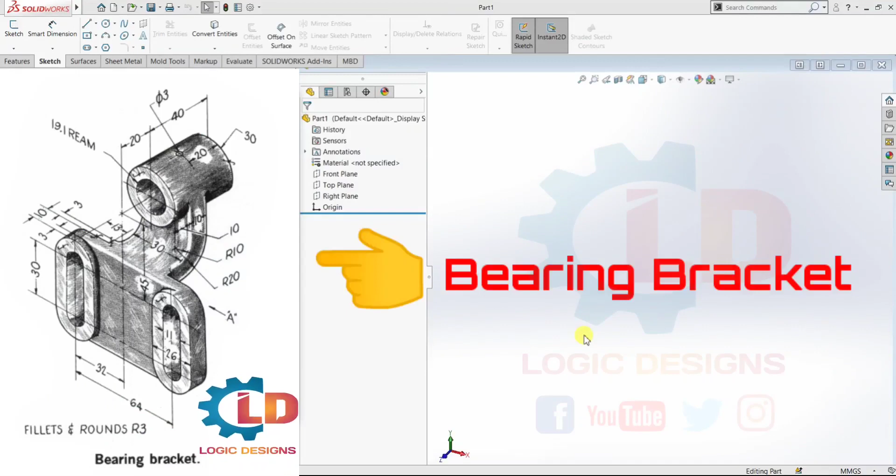Now this is our SolidWorks working interface. Now you can see here on left side of the computer screen or a mobile screen, this is our today's 3D model of a bearing bracket. Now read all drawing annotations or dimensions from this given image.

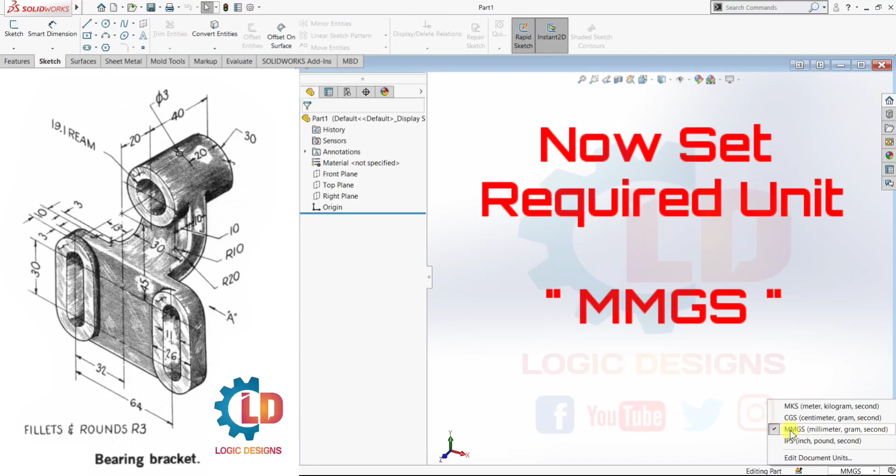Before that, select unit. For that, go to the right bottom corner and select MMGS. You can select CGS, MKS and IPS as per your drawing requirement. Here my requirement is MMGS, so MMGS is selected. Now here I am creating this 3D model as per given image.

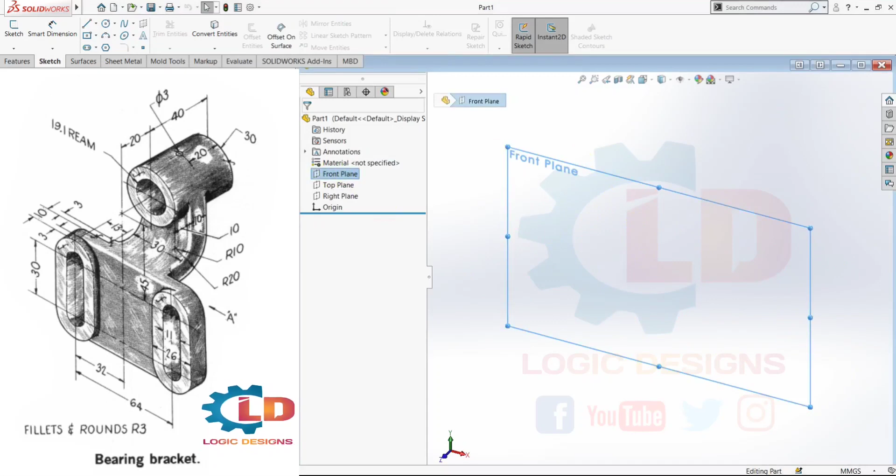Now class, create here first bottom side of a bearing bracket on a front plane. Select front plane and go to the sketch. Select sketch and press Ctrl+8 for normal to. Now create your first vertical center line. For that, go to the center line. Now create center line from UCS. Okay. Now create one horizontal line also.

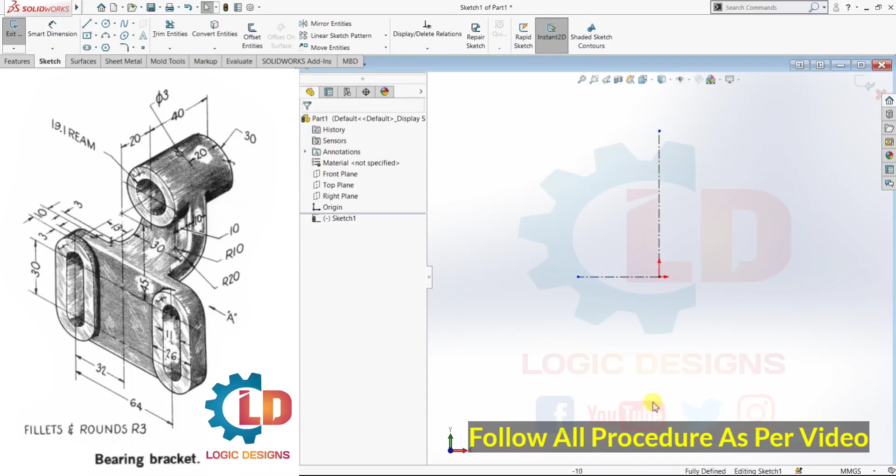Create line by using line command, and put here smart dimensions. Select smart dimensions and select this line and put here 32 mm. Here I am putting 32 mm distance. Now again create one vertical line from end point of this horizontal line. Now put here smart dimensions 30 mm.

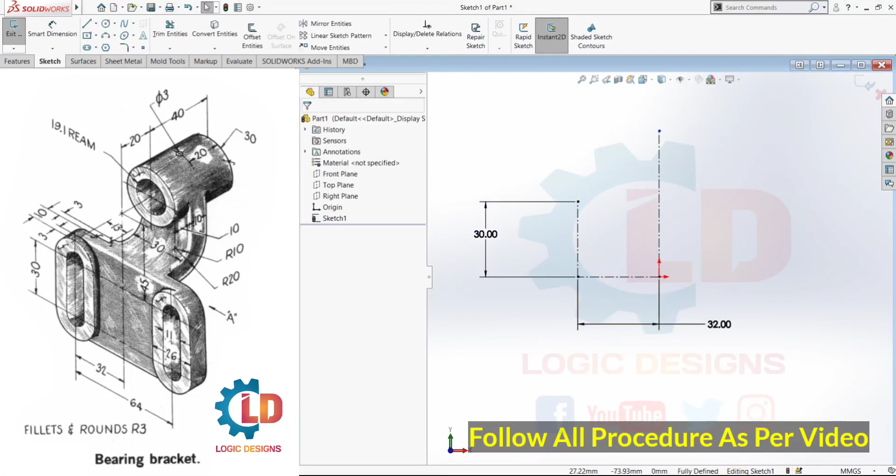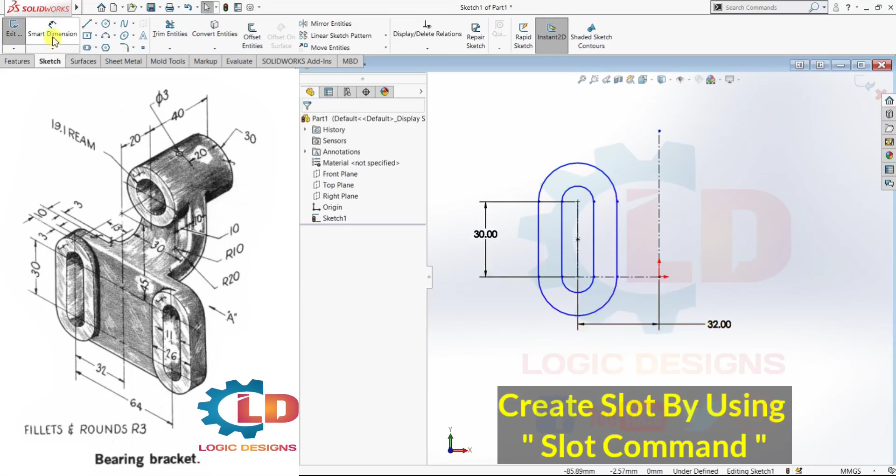Now we are creating slot by using slot command. Select slot command and select these 2 points, point 1, point 2, and create slot. Another one. Okay. Now slot is created. Now give smart dimensions as per our given image. Select this line. Select this line. Put here 26 mm. Now inside one slot, this is 11 mm. Select this line and put here 11 mm. Now our sketch is fully defined.

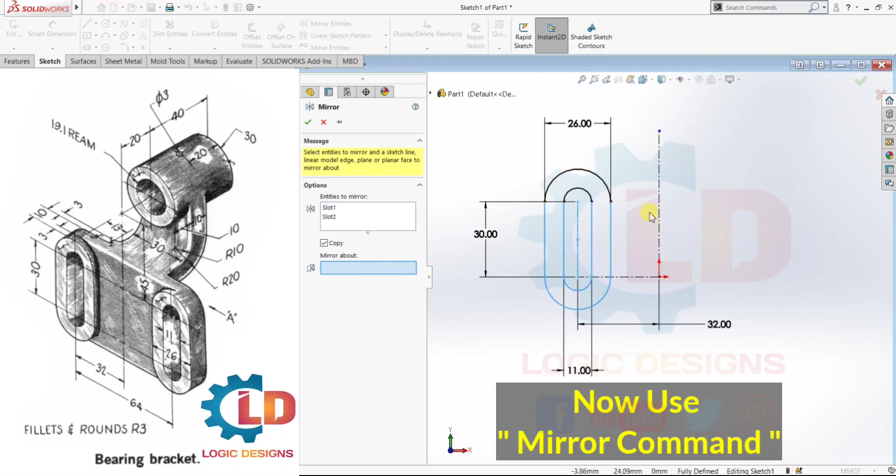Now mirror this object on a right side. Go to the mirror entities. Select the mirror entities. Select all required entities. Now mirror about, select vertical center line. Now I can show another slot is created on right side also.

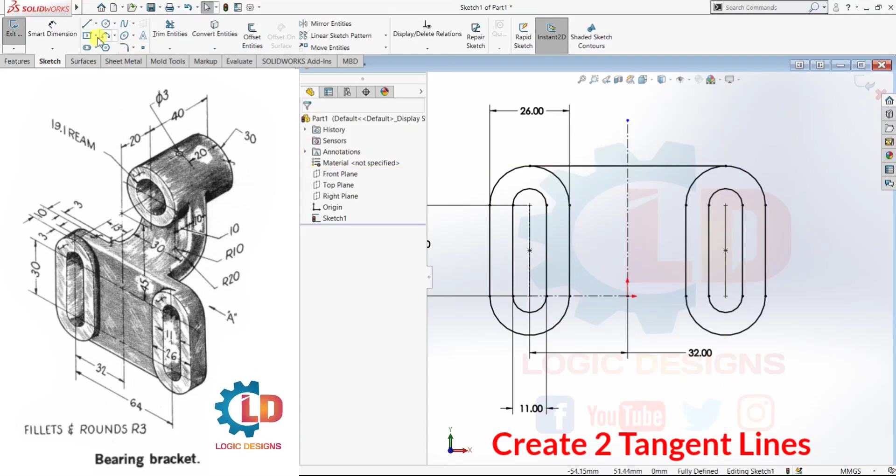Now create 2 tangent lines between these 2 slots. For that select line, select center point, select center point. Okay, now line is created. Now again one line for a bottom side. Now our sketch is fully defined and bottom portion of this bearing bracket is now completed.

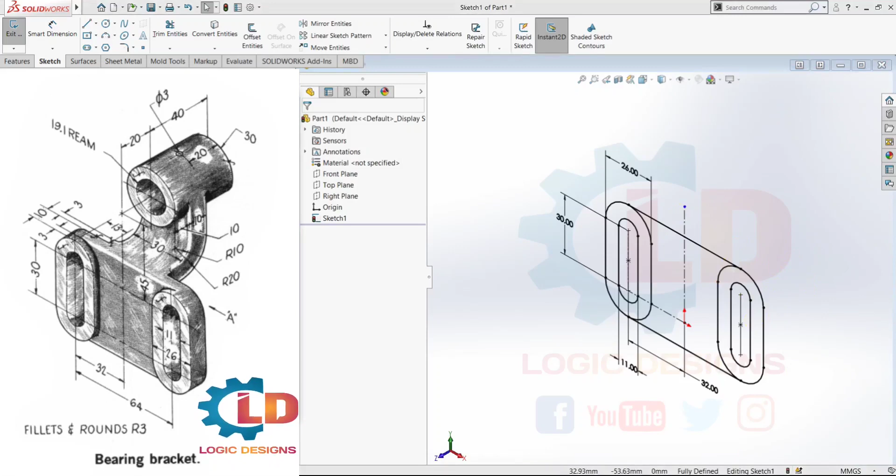Now extrude this slot or a bottom part as per our given drawing. For that, go to the extrude boss base, select only these two slots, and put here 10 mm. Here I am putting 10 mm. Now okay.

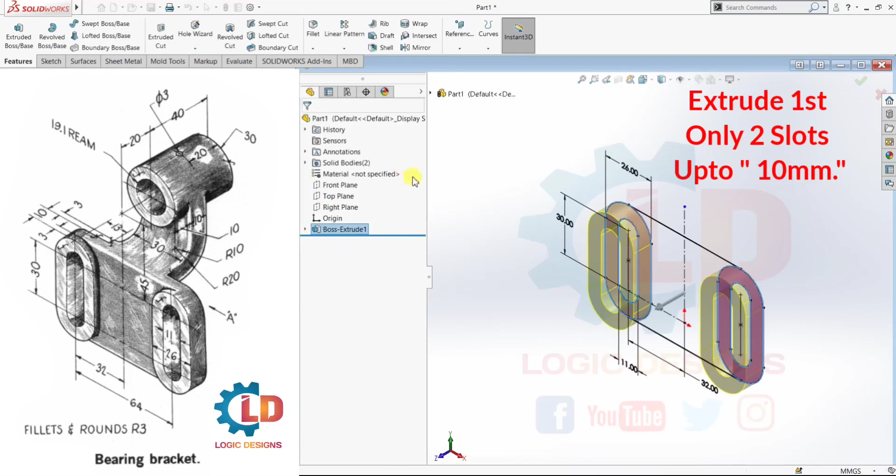Now we need sketch 1 for another extrude. For that, show this sketch: go to the tree, select the sketch, right mouse button click and select eye icon to show the sketch. Now sketch is shown. Now again go to the extrude boss base, select any line. Now go to the selected contours and delete this one.

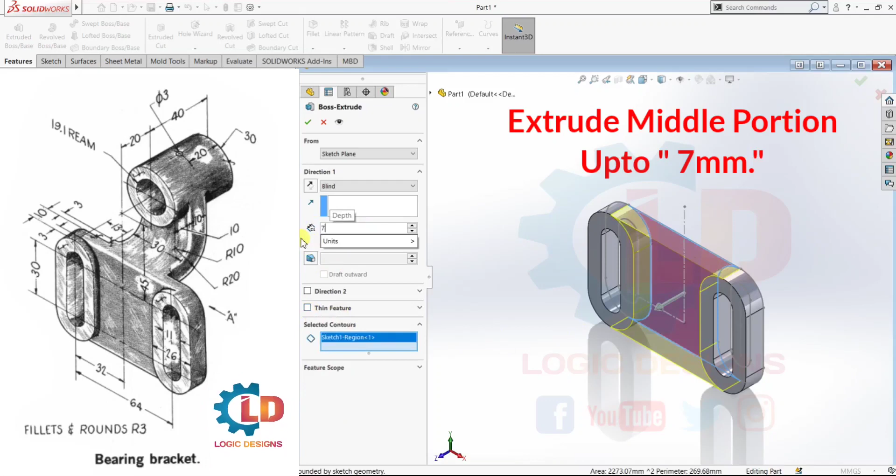Now select required portion. We need this middle portion. Thin feature off, uncheck this one and put here 7 mm distance as per our drawing. Now click on OK option. Now our bottom portion is created. Now hide the previous sketches. I can say the bottom portion is now done.

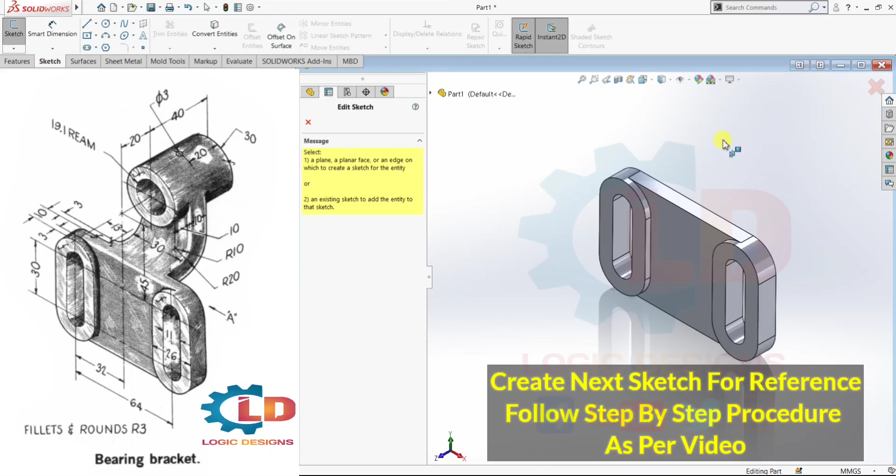Next one, we need to create plate sketch on a top side before we create the angular portion from given drawing. For that, select top portion of this bottom plate. Select this one. Now sketch on it. Now first create one vertical center line. Okay. Select vertical center line. Create one. Now vertical center line is created. Next one, another center line for horizontal. Now horizontal line is created.

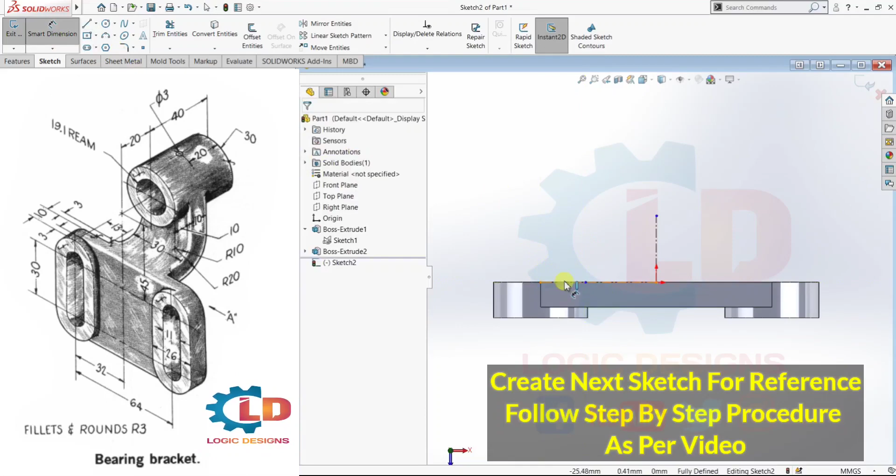Again another center line. Create this one. Now put smart dimensions 13 mm. Select these points and put here 13 mm as per our drawing. Next one, create one vertical line. For that, go to the line, select this point and up to this vertical line. Now two lines are created, vertical and horizontal line. Now again smart dimensions, put here 3 mm. Now our sketch is fully defined.

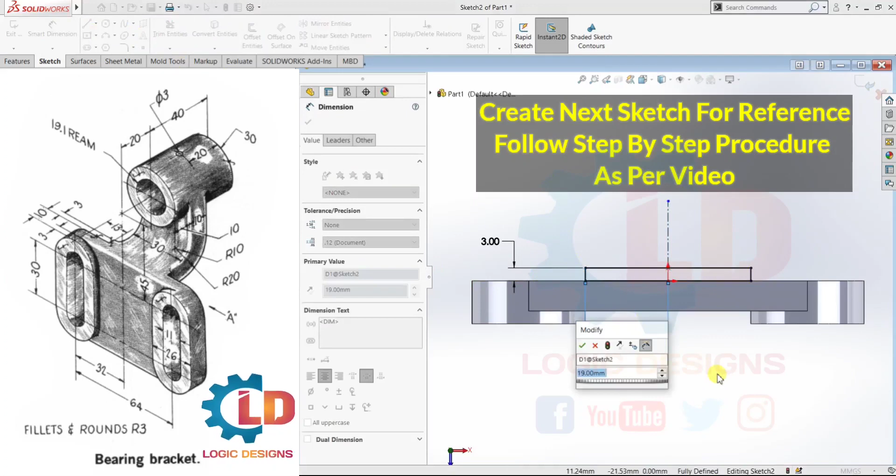Now mirror these entities on a right side. Select mirror entities, select these lines, mirror about vertical center. Now sketch is done. Our sketch is fully defined. Now go to the convert entities and select this line. Now delete all unwanted area. Now again smart dimensions and put the distance. Put here 19 mm distance. Now our sketch is fully defined.

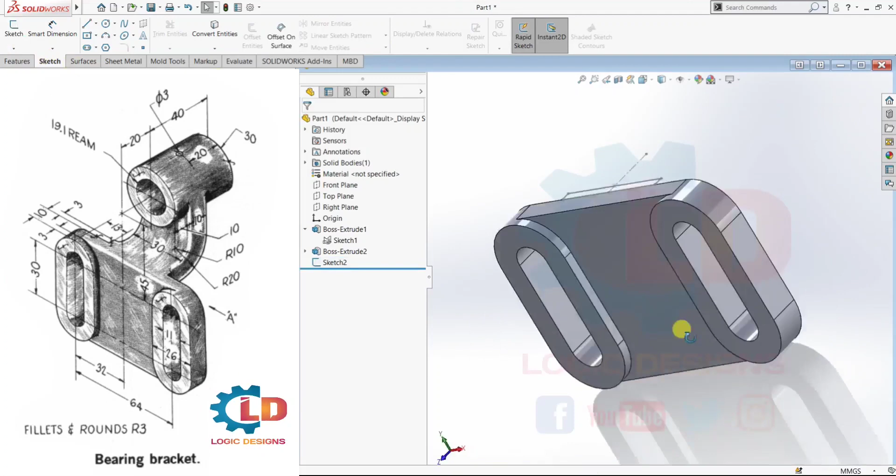Next, we need to create angular portion of a bearing bracket. For that, we need to sketch on a new right plane. Now exit the sketch because we need this sketch at last. For next sketch, select right plane to create curvature portion. Okay, right plane. Now expand this one.

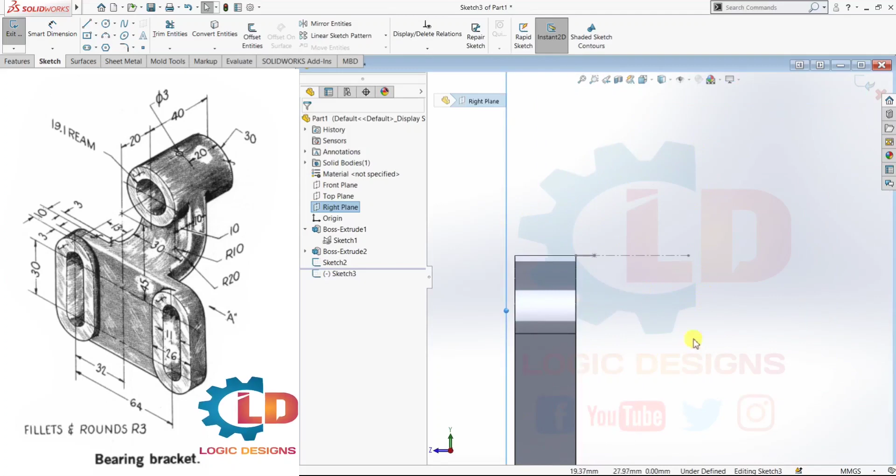Now go to sketch. Now press Ctrl+8 for normal to. Now hide previous sketch 2. Now sketch 2 is hidden. Now start the drawing for sketch 3.

Now first, create one center line. Go to the line, select center line and create one horizontal center line. Now put smart dimensions as per our drawing. Here I am putting 20 mm distance. Now next one,

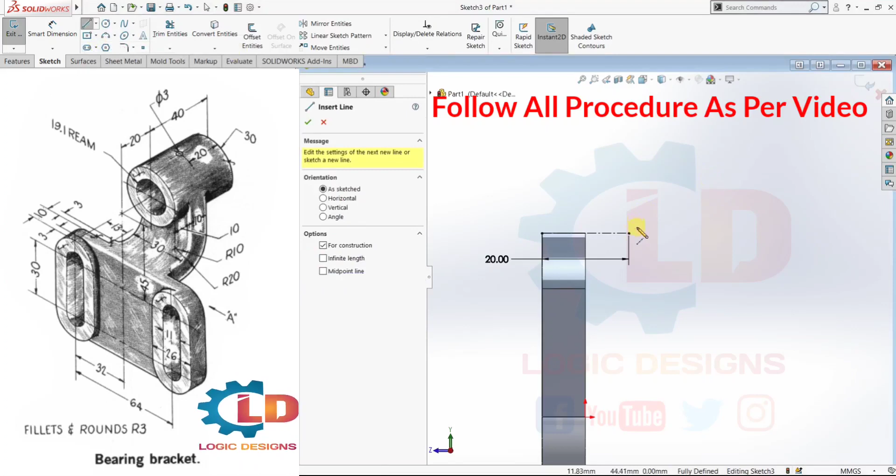create another line from the end point of this previous line. Select line, select center line. Okay, center line is selected. Now create horizontal and vertical center line. Now put smart dimensions. First horizontal line distance is 10 mm and vertical line distance is 32 mm. Put here 32 mm. Now next one, offset the vertical center line.

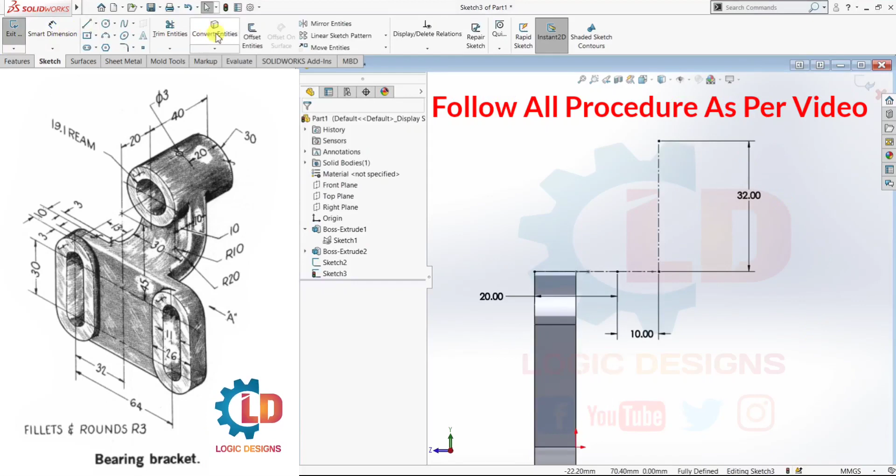For that, go to offset entities, select vertical center line, check this reverse option and put here 5 mm distance. Now create one horizontal line. For that, go to the line and create one line. Use sketch 2 as a reference. Now go to the fillet, select this vertical line, select this horizontal line and put here 10 mm fillet radius. Now OK.

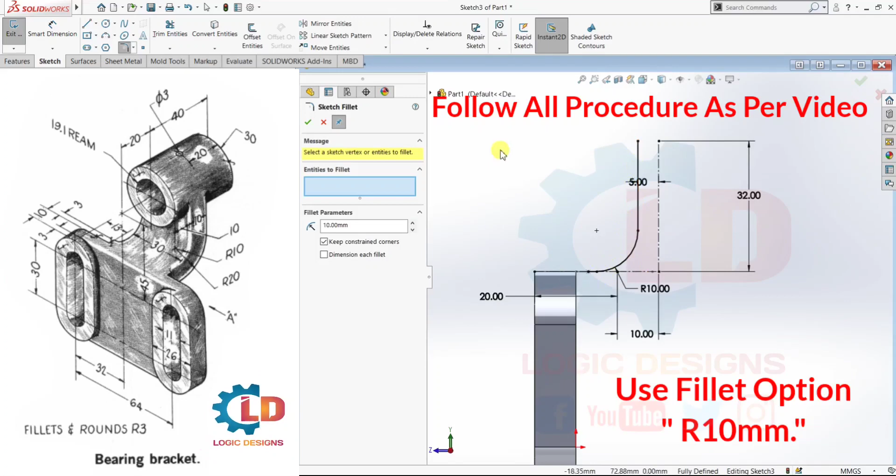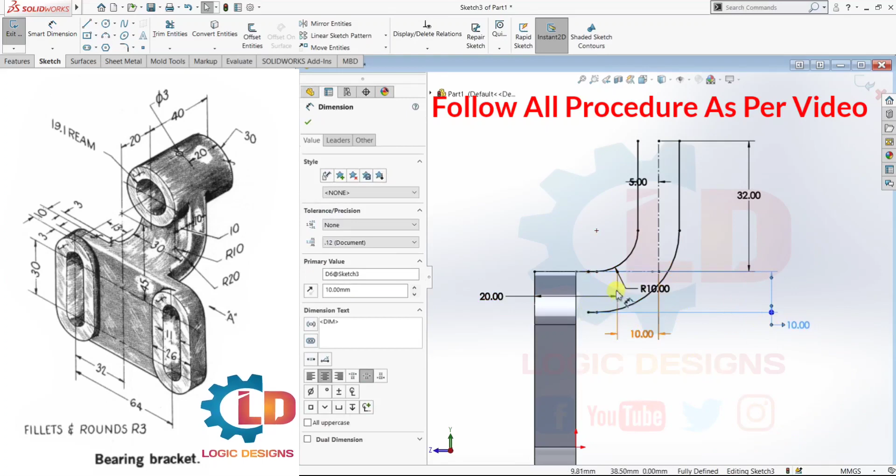Now curvature portion done. Now offset this curvature portion up to 10 mm. Select 10 mm. Now OK. Now close this curvature portion by using line command. Select line command and close these open portions. Now top side also. Now our curvature portion is done.

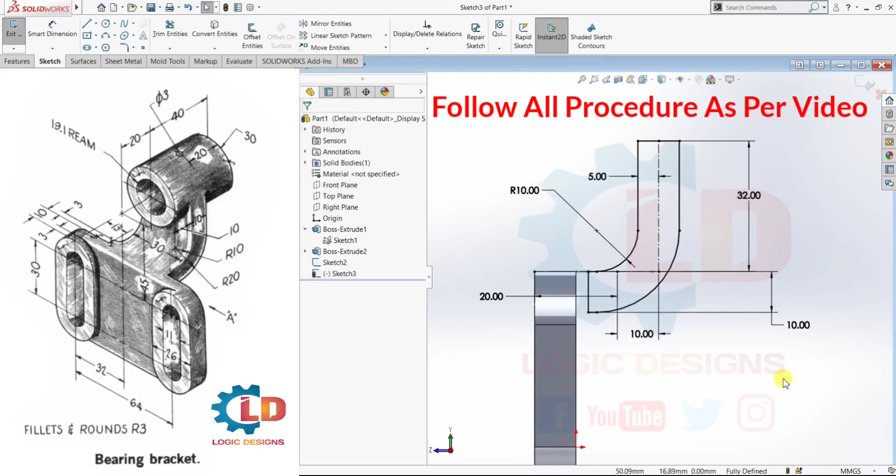Now extrude this curvature portion as per our given drawing. Go to extrude boss base. Select this curvature portion. In direction, select mid plane and put your distance 30 mm. Now OK. Now our curvature portion is done.

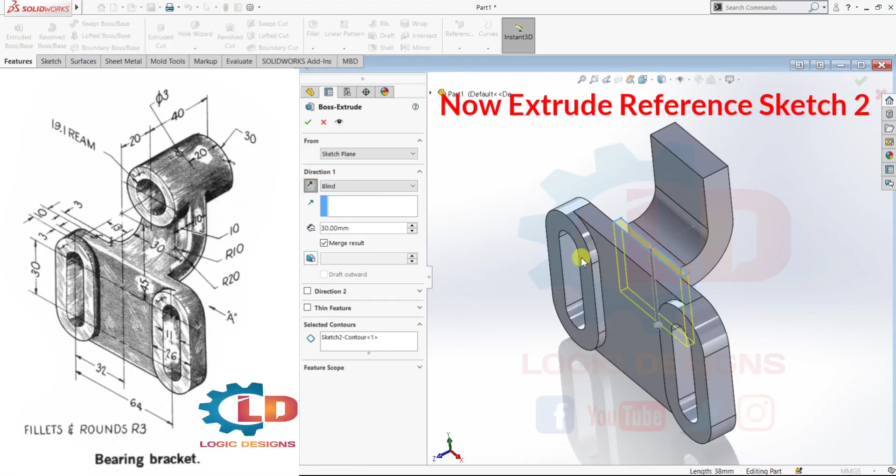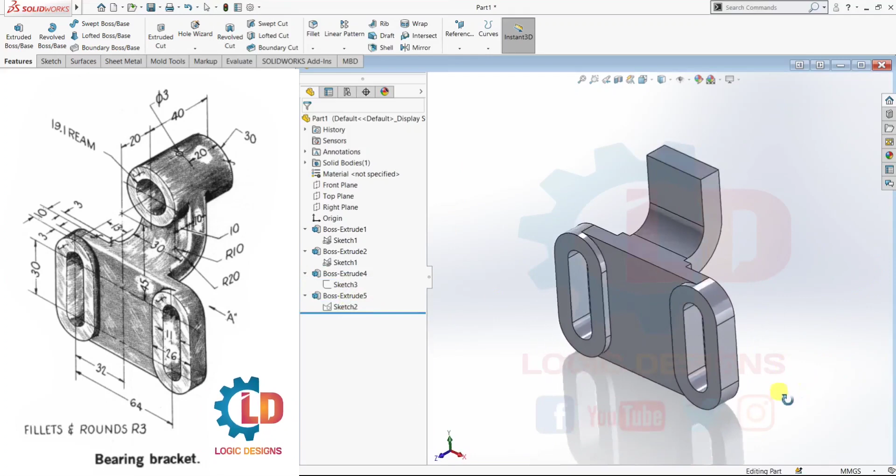Now we need sketch 2 for creating the plate between curvature portion and bottom plate. Select extrude, select any one line from sketch 2 and put your distance 30 mm. This distance is not given in the drawing, so we need to assume as per our requirement. Now hide all sketches. Next, we need to create one cylindrical object at the top side.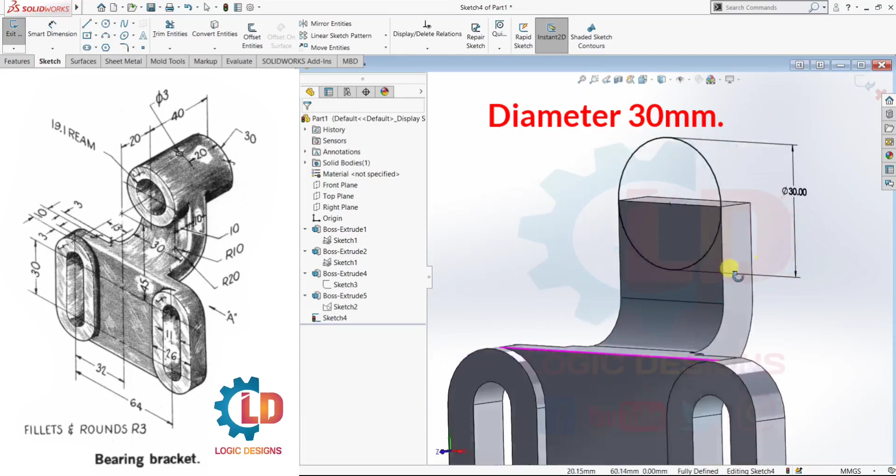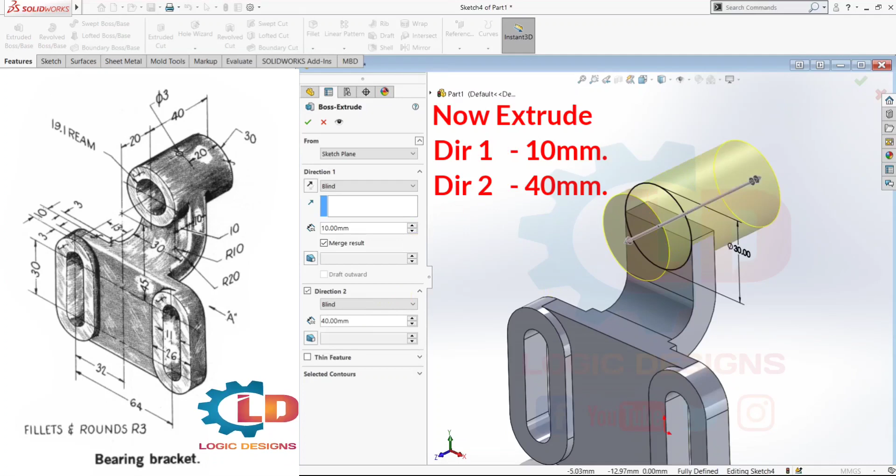Extrude this circle by using extrude boss base command. Go to features and select extrude boss base. Select the circle. We need direction 1 and direction 2 also. In direction 1 put 10 mm, in direction 2 put 40 mm. OK. Now our cylinder portion is done. Next, we need to create 19.1 mm ream by using hole wizard.

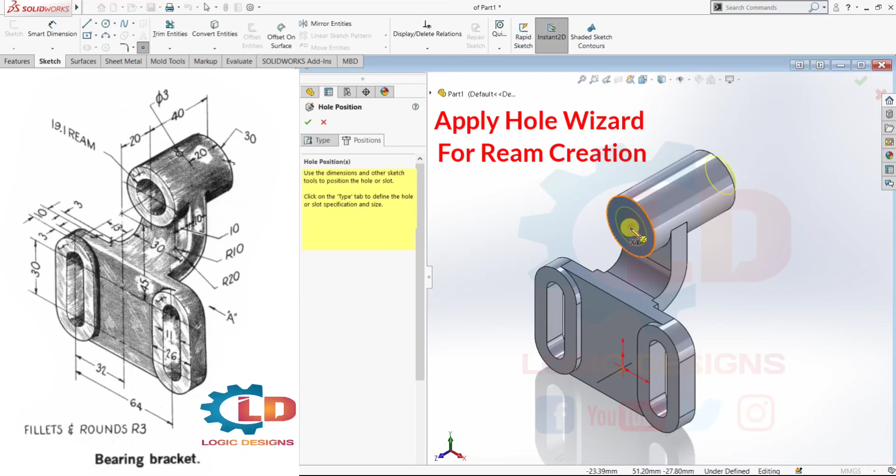Select hole wizard, select third type. Now go to the type, dowel holes, size, select show custom size and put here 19.1 mm. Next, select end condition up to blind. Now go to position, select 3D sketch, select center point. Now our hole is created on the cylindrical portion. Next, we need to create 3 mm keyhole.

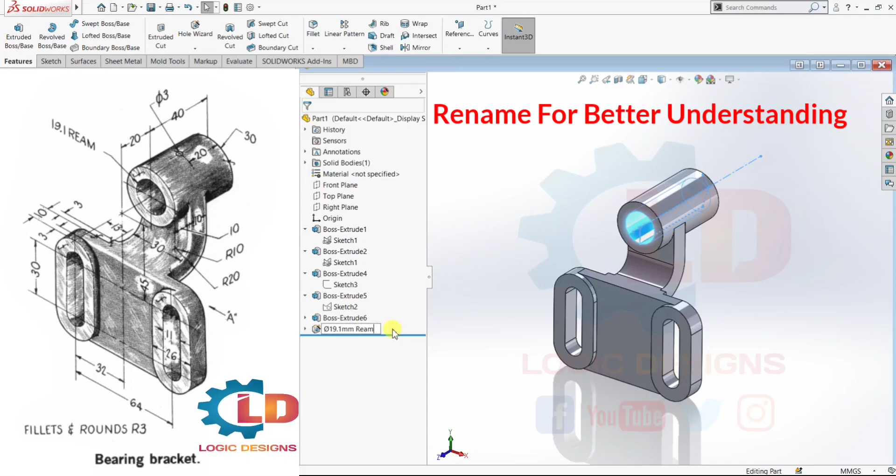Before that, we need to rename our previous hole. Put here 19.1 mm ream. Here I am putting 19.1 mm ream to understand the ream size, because 19.1 mm size is not present in hole wizard. Next, we need to create 3 mm keyhole.

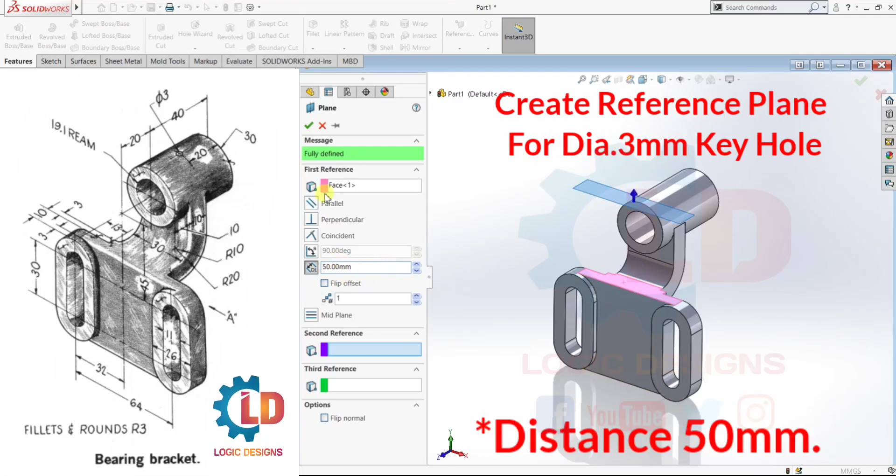For that, we need one reference plane. Select plane. In first reference, select this top face and put here 50 mm distance. Now our plane is created. Now expand the end conditions. Go to sketch, select this plane. Ctrl+8 for normal to, create one vertical center line. Go to line, select center line, create one center line.

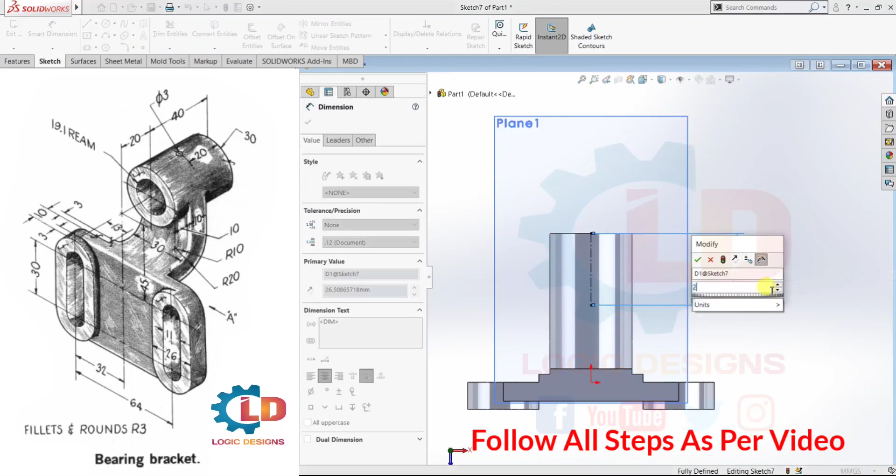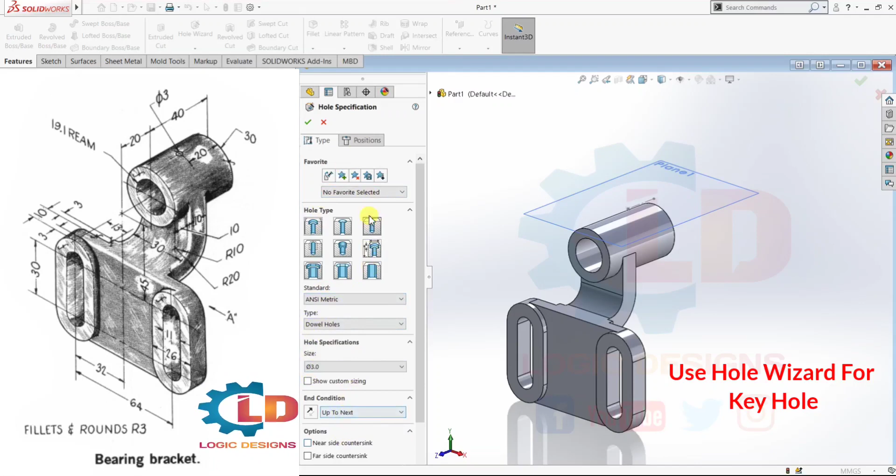Now give smart dimensions to locate 3 mm keyhole. The distance is 20 mm. Select point option and create one point. Now we need hole wizard to create this keyhole. Exit the sketch, select hole wizard, third type hole, dowel hole, size is 3 mm and end condition is up to next. Now position, select previous point. Now our keyhole is created. Hide this plane, hide the sketch. I can see the 3 mm keyhole is present there.

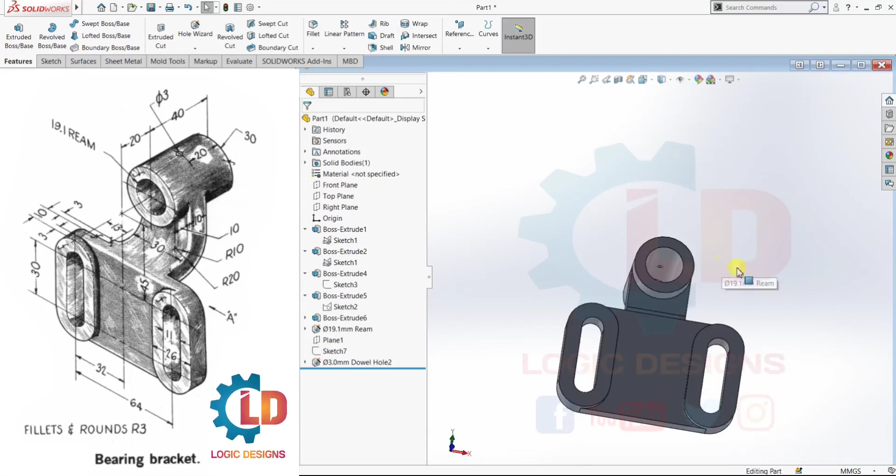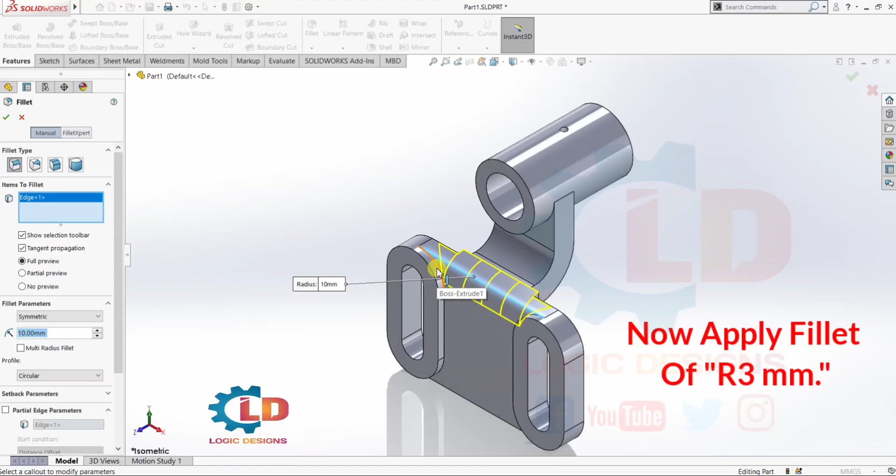Next, we need to give fillets to this bearing bracket. The fillets and rounds are of radius 3 mm. Go to fillet, select the edges where fillet is required. Select one by one and put 3 mm radius. Now done, fillet is done. That's it class. I hope you like this video tutorial of bearing bracket.